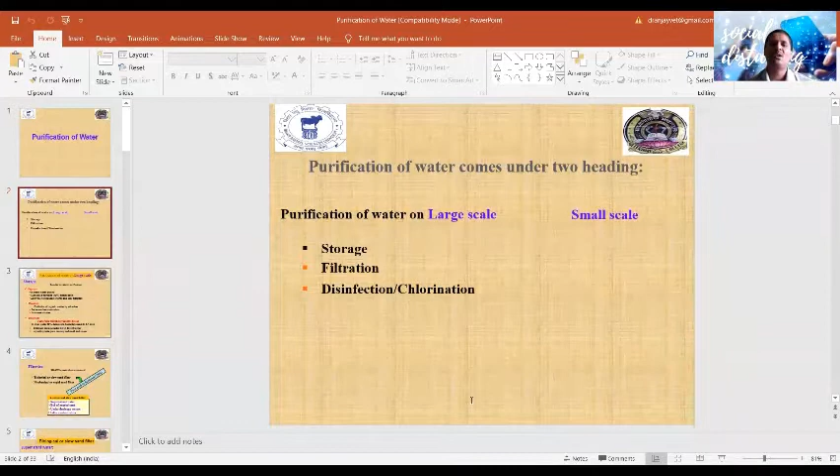So purification of water on a larger scale includes the first step, that is storage. Storage has an important role in the natural purification mechanism. It works under natural purification systems that have the capability to reduce physical, chemical, as well as biological contamination. Water quality improves by storage. About 90% of the suspended particles settle down by gravitational force, allowing the penetration of light, and that reduces the burden on the purification or filtration mechanisms.

Chemically, oxidation happens during storage. Organic matter gets oxidized by the actions of microbes, and there is a decrease in free ammonia concentration, as well as an increase in the nitrate concentration of the water.

In biological quality, most pathogenic organisms gradually die out, and in river water there is about a 90% decrease in bacterial counts when storing up to 5 to 7 days. If you store water for 5 to 7 days, there is a 90% decrease in the total bacterial count of the water.

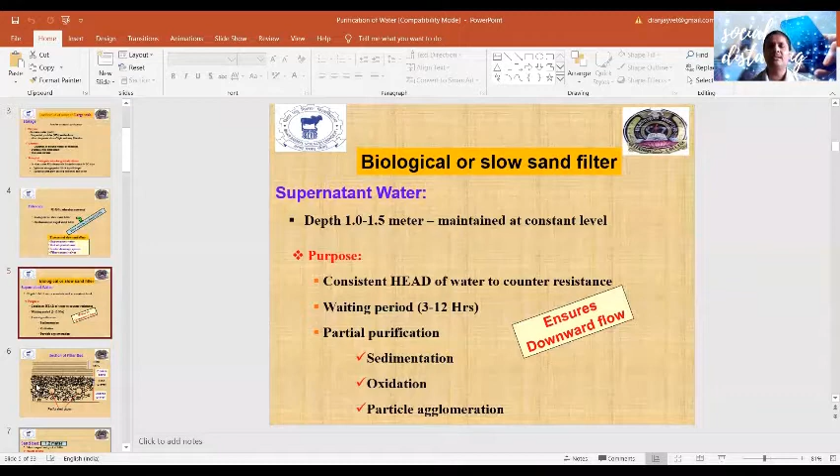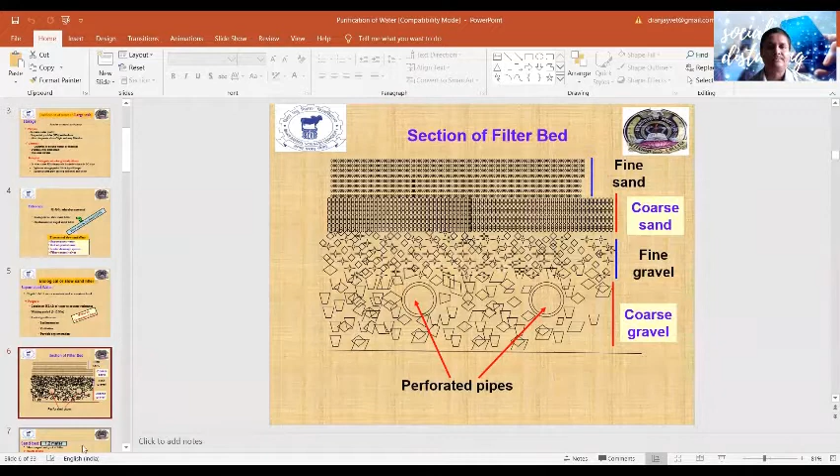So here we can see the sections of the filter bed: sand particles, coarse sand particles, fine gravels, followed by coarse gravels, and in the coarse gravel there are perforated pipes to carry out the water. The second part of this filtration unit is the sand bed, one of the most important parts of the filter. And again, we have to consider the quality of the sand particles.

So sand particles that are used in slow sand filters are round in shape with 0.15 to 0.35 millimeters diameter, and they must be clean and free from clay or organic matter. Sand beds are mainly supported by graded gravels, that is coarse sand, fine gravels, and coarse gravels.

The sand bed presents a larger surface area. The smaller particles lead to a large surface area. So 1 cubic meter of sand equals 15,000 square meters of surface area. The water passes through the sand bed slowly, requiring at least 2 hours or more during passage.

There are various mechanisms of purification, like mechanical straining. When the slow sand filter is newly established, it only acts as a mechanical strainer, nothing else. As time passes, certain types of vegetation growth develop, which we see in later slides, and the work of the slow sand filter starts after the development of this vegetative or microbial flora.

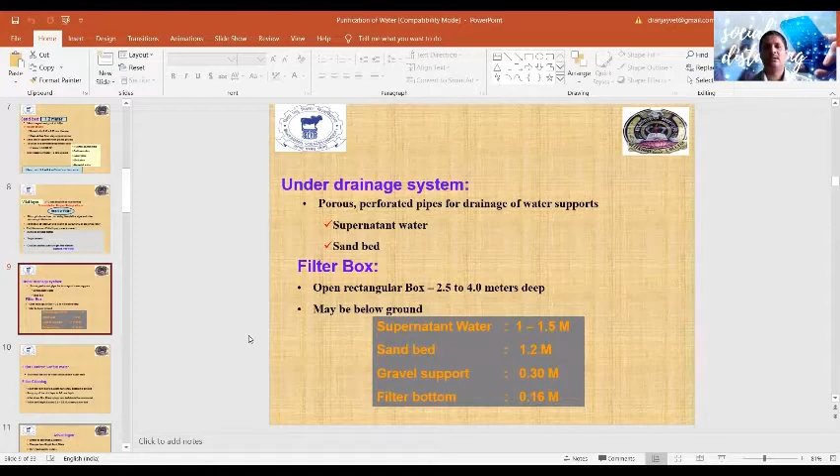Filter control: the efficiency of the filter is regulated by a filter control valve, most commonly known as the Venturi meter. It controls the flow of water and maintains the water head, meaning constant flow of water. After a long time of running the slow sand filter, there is a buildup of resistance, so we have to keep the Venturi meter open to maintain the constant flow of water to the filter bed.

After a few months, the filter may get dirty, or lose its proper efficiency. That is the time for cleaning the filter. When we have to fully open the Venturi meter, it's advised to clean the filter bed. The cleaning of slow sand filters is performed by the mechanism of scraping.

So you have to scrape the top of the vital layer up to 1 to 2 centimeters of depth, and after about 20 to 30 scrapings, that is the time of closing of the filter units, and you need to construct a new filter bed or sand bed when the bed height of about 0.5 to 0.8 meter remains. So that is the time of construction of the new filter bed.

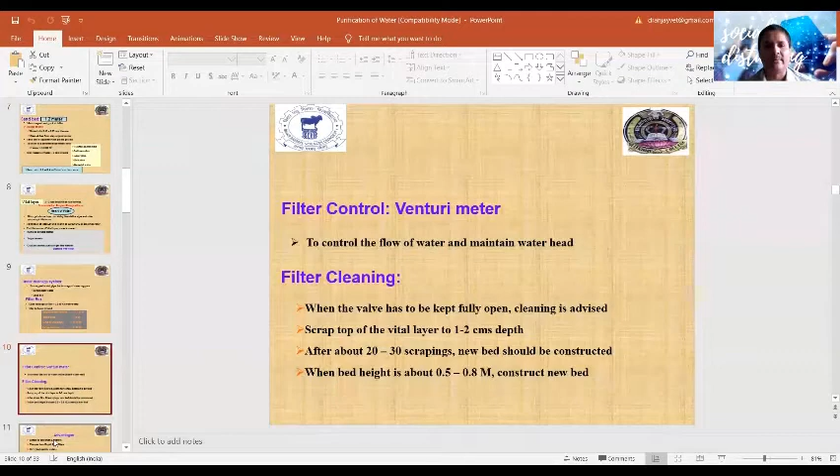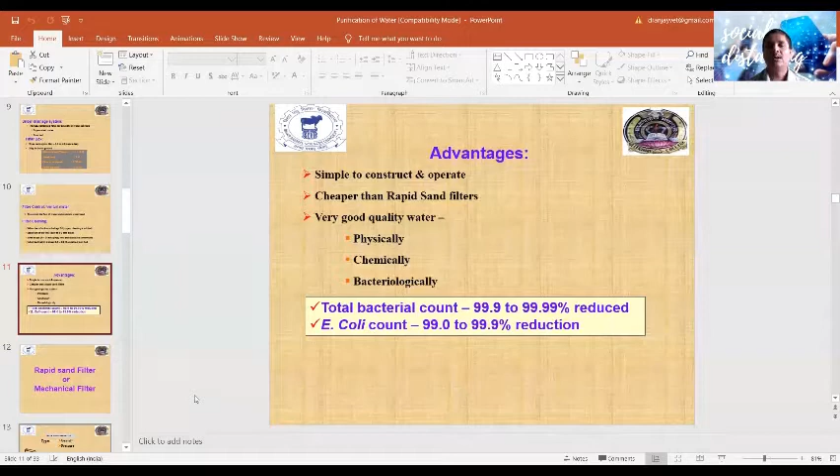There are certain advantages of slow sand filters. It is simple to construct and simple to operate, and it is cheaper than rapid sand filters. It produces very good quality water: physical quality, chemical quality, as well as bacteriological quality. It reduces the total bacterial count up to 99.9 to 99.99%, and particularly the Escherichia coli count up to 99 to 99.9%.

The second type of filter used for large scale purification of water is the rapid sand filter, also known as the mechanical filter. The rapid sand filter was first used in the USA in 1885, and it has two types. One is the gravity type, which works on gravitational force, and the second is the pressure type, based on pressure. Here there is no need of storage of the water. We can directly purify water from the source.

Next is the flocculation chamber. Here we slowly mix the water, which leads to the development of flocculates or agglomerates. Next is the sedimentation chamber, where all agglomerated particles get settled down. And finally the filter unit, just like slow sand filters, but here it works from the establishment, because there is no need to wait for development of the zoogleal layer, the vital layer of the filter.

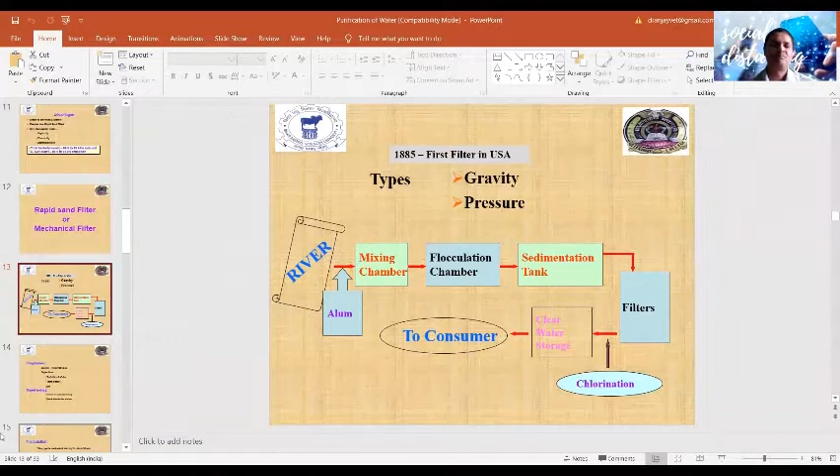One by one, first is coagulation. We have to treat the river water with alum at a concentration of 5 to 40 milligrams per liter, but the amount of alum used depends upon the turbidity and color of the water, the temperature of the water, as well as the pH of the water. Second is the mixing chamber. Here we perform rapid mixing of the water through violent mechanical mixing, which leads to rapid distribution of the alum throughout the water.

Next is the flocculation chamber, where there is slow and gentle mechanical stirring of the water for a period of about 30 minutes, which leads to the generation of thick flocculates of aluminum hydroxide. And finally, there is the sedimentation chamber, where water is stored for a period of 2 to 6 hours for settling down of the flocculates. These flocculates may contain various types of impurities as well as the microflora.

In this sedimentation chamber, 95% of the precipitates or flocculates must get settled down, and they are removed by various cleaning operations of the sedimentation tank.

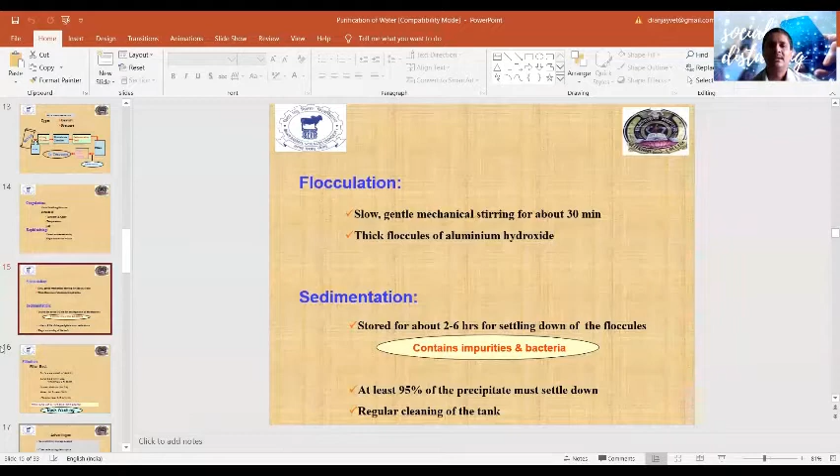Next is the filtration. This filtration unit, the rapid sand filter, contains the filter bed. It has a surface area of 80 to 90 square meters, sand particles of about 0.6 to 2 mm, gravel of 30 to 40 centimeters, and a water layer of 1 to 1.5 meters. It has a filtration rate of about 5 to 15 cubic meters per square meter of surface area per hour.

Then, just like the slow sand filter, when the head loss of the rapid sand filter is 7 to 8 feet, that is the time for cleaning. The rapid sand filter is cleaned by the process of backwashing, the reverse process. We flow water from the bottom towards the top, so all the impurities over the filter bed get dislodged, and that is judged by the coming out of clean water or clean sand particles.

So that's the only difference between the cleaning operations of slow sand filters and rapid sand filters. In slow sand filters, cleaning is performed by the process of scraping, and in rapid sand filters, cleaning is performed by the process of backwashing.

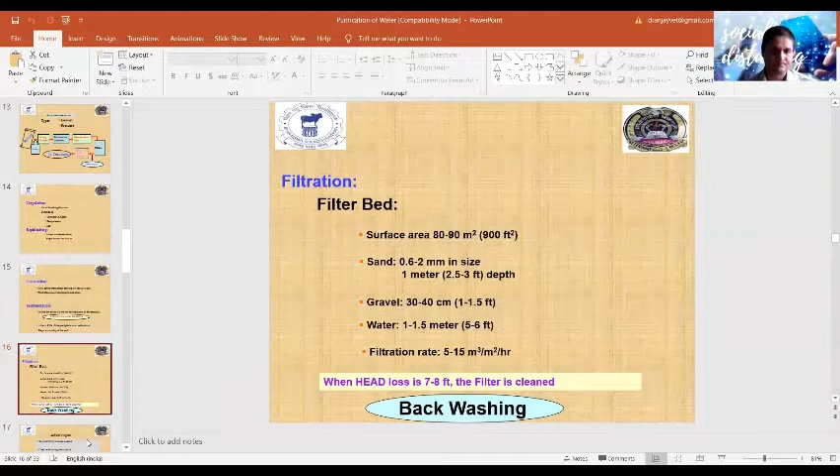There are certain advantages of rapid sand filters. This filtration unit does not require prior storage of the water. Filter beds occupy less space, so it's suitable for larger metropolitan cities. It filters 40 to 50 times more water than biological filters, so it has the capability to fulfill the requirements of a large population. The washing process, backwashing, is easy, and there is flexibility in the operation.

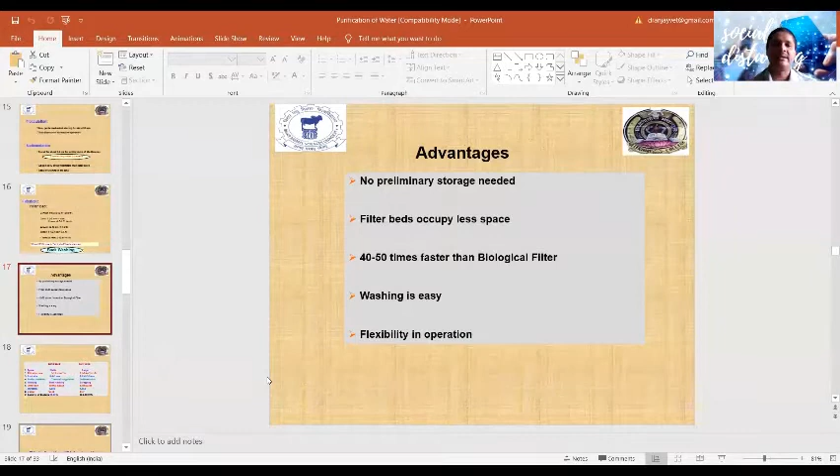Now we can see the major differences between slow sand filters and rapid sand filters. In space requirements, the rapid sand filter requires less space compared to slow sand filters. Then the rate of filtration, sand size, preliminary treatment. The slow sand filter requires only storage and sedimentation, but here we require chemical treatment like chemical coagulation. For washing, scraping versus backwashing. The slow sand filter requires less skill, and the rapid sand filter requires highly skilled persons.

Regarding turbidity and color, both produce good quality; they remove color and turbidity. Then the removal of bacteria: slow sand filters remove 99.9 to 99.99% of total bacteria, however the rapid sand filter only removes 98 to 99% of total bacteria.

The third step of water purification is disinfection. In water purification, disinfection is synonymous with the term chlorination. Chlorination is only a supplement; it can't act as a substitute for filtration of water. Its properties: it kills all pathogenic bacteria. However, it has no effect on viruses like poliovirus and hepatitis virus, bacterial spores, or protozoal spores, except in higher doses. At a normal dose it has no effect on these viruses and spores, but in higher doses it can kill the viruses and lyse these spores.

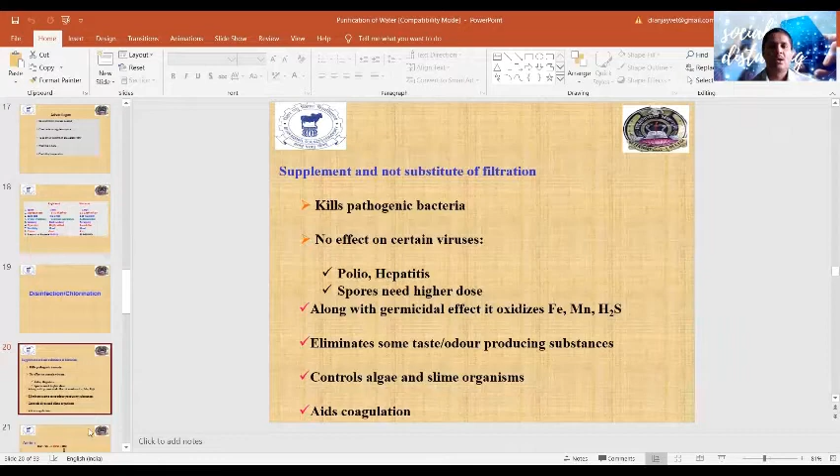Now the action of chlorine. The most common source of chlorine is bleaching powder. There are two active compounds: one is hypochlorous acid and second is the hypochlorite ion. The major disinfectant action is due to hypochlorous acid. The hydrochloric acid gets neutralized by the alkalinity of the water. So the disinfection action of bleaching powder is because of hypochlorous acid, and to a lesser extent due to the hypochlorite ion.

Hypochlorous acid is 70 to 80 times more active than the hypochlorite ion, and its best action is achieved at pH 7, and fortunately the pH of water varies from 6 to 7.5. At pH 8.5, the action of chlorination is unreliable because 90% of the hypochlorous acid gets converted into the hypochlorite ion. Chlorination is based on various principles that we have to know.

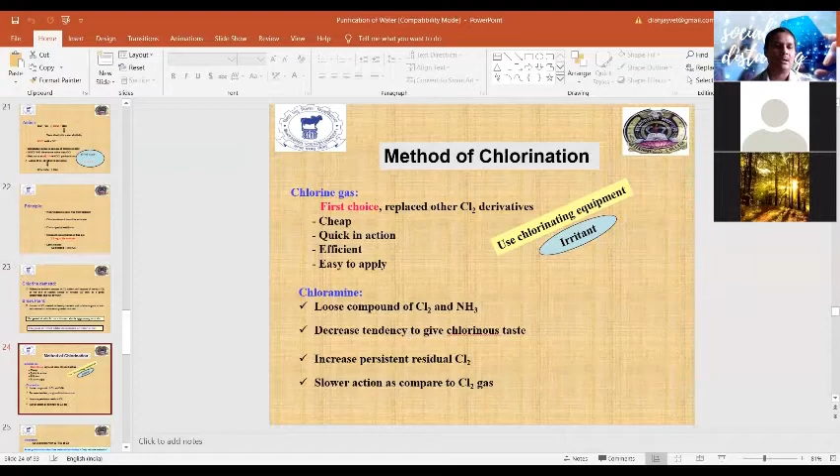Second compound is chloramine, that is a loose compound of chlorine and ammonia, and it has less tendency to give a chlorinous taste to the water. In other words, it does not impart taste to the water. It increases the persistence of the residual chlorine, and its action is slower compared to chlorine gas. Next, perchloron. It is a calcium compound with 60 to 70% available chlorine.

So breakpoint chlorination and free residual chlorination is the only reliable method of chlorination. Addition of chlorine till all the organic matter present is completely oxidized and a little amount of free chlorine is left in water, that is breakpoint chlorination. Then superchlorination: addition of a greater amount of chlorine to lyse viruses and certain types of spores, but the excess requires removal by the process of dechlorination.

So superchlorination as well as dechlorination is the only suitable method for heavily polluted water, or a water source assumed to contain viruses and the spores of various bacteria and parasites. We can measure free chlorine as well as combined chlorine in the water by the test called the OT test or orthotolidine test. This test was developed in 1918. It detects both free as well as combined chlorine.

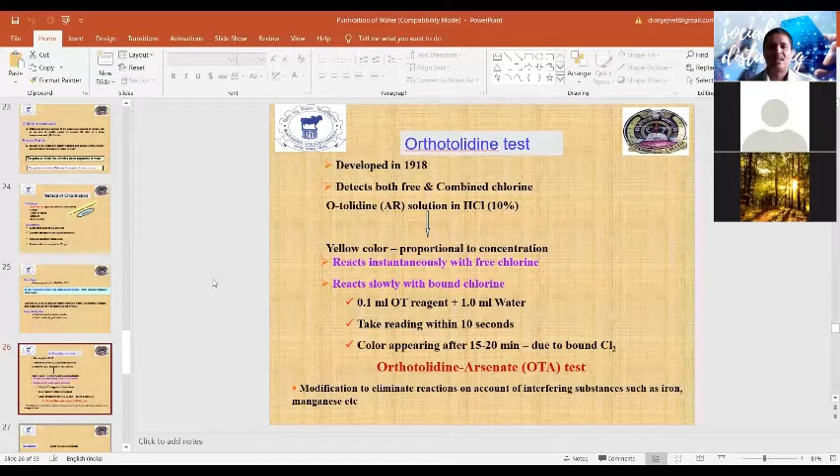So next, after chlorination, there are certain other mechanisms of disinfection of water; one of them is ozonization. It has, you can say, great potential of use, and it was first used in France in 1906. But it has certain advantages as well as disadvantages.

So it is considered a powerful oxidizing agent. It has the capability to remove the undesirable odor, color, and taste of the water, and it also inactivates certain types of viruses. However, it has disadvantages also. Unlike chlorination, it does not have any residual effect, and it may be used in a concentration of 0.2 to 1.5 milligram per liter of water.

Next is UV radiation. It is again effective against most water-containing microbes like bacteria, virus, yeast, but not used on a larger scale, because for penetration of the UV irradiation light, we need to distribute the water at a thickness of about 120 mm, and the wavelength most commonly used for UV irradiation of water is about 200 to 295 nanometer.

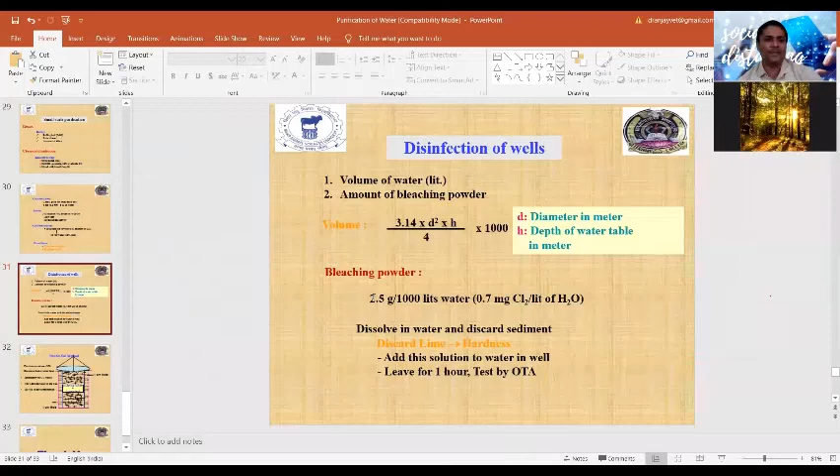So आप उसके बेसिस पर मेजर कर सकते हैं। उसके बाद NEERI, नेशनल एनवायरमेंटल इंजीनियरिंग रिसर्च इंस्टीट्यूट नागपुर ने जो दिया है, that is a double pot method for disinfection of the well. So for continuous release of the chlorine into the well, the bucket is placed 1 meter below the water level, and it gives satisfactory results for disinfection of the well water for at least 2 to 3 weeks, with a water capacity of the well of about 4,500 liters, with a daily consumption rate of 360 to 450 liters per day.